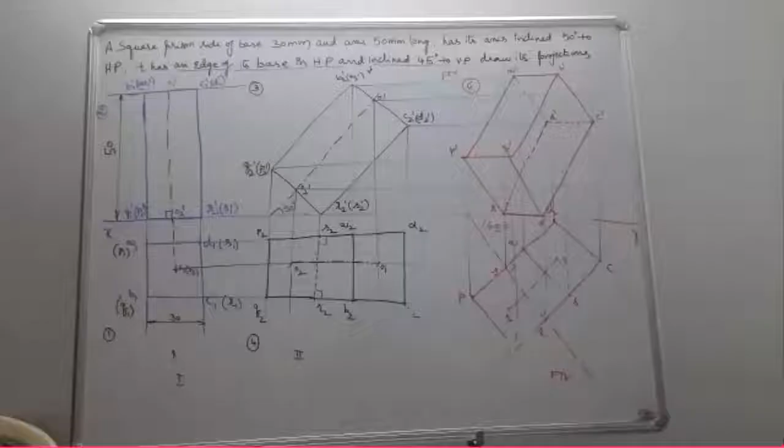Tausif? Sir? Tausif, respond. Are you there? Yes, sir. Tausif, your voice is not audible. Is the screen visible, Tausif? It is completely visible, sir. It is audible, sir. Sir, it is audible.

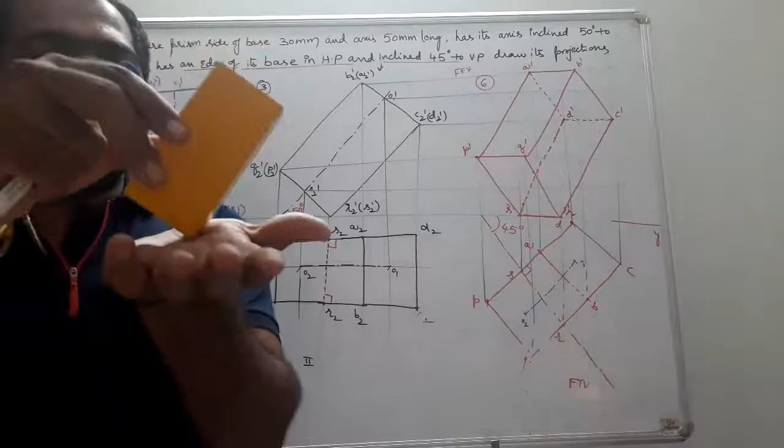Next, what is stage 2? Always consider the axis inclination such that one of the base edges is on HP like this. So this base edge is on HP. When you see the front, you see this point and this point is invisible. So that means R of S is going to be on HP, such that I reconstruct the figure in such a way that it is making 50 degrees to the HP. I reconstruct the figure such that R of S is on XY.

From here, draw the vertical projectors. From here, draw the horizontal projectors and mark the intersection points. So you will obtain your top view. Next, up to this 1, 2, 3, 4, we already did so many problems.

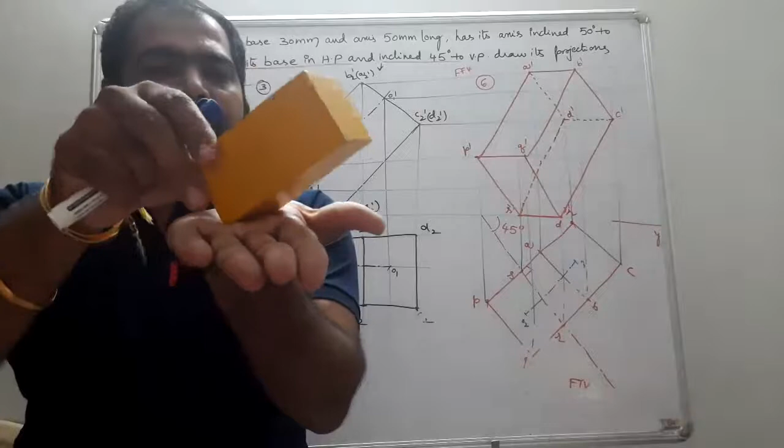Now, what was your stage 3? Solid resting on HP, axis is inclined such that one of the base edges is on HP, and the edge which is resting on HP is making an angle of 45 degrees to the VP. So that means in this position we can say it is inclined to both the reference planes. So when it is inclined at 45 degrees to the VP, I just draw a line of 45 degrees. The edge SR is to be on this 45 degrees line, and I reconstruct the figure.

Once I reconstruct the figure, draw the vertical projectors and the horizontal projectors and mark the intersection points. Join all the points and you will obtain the final front view. Okay, students.

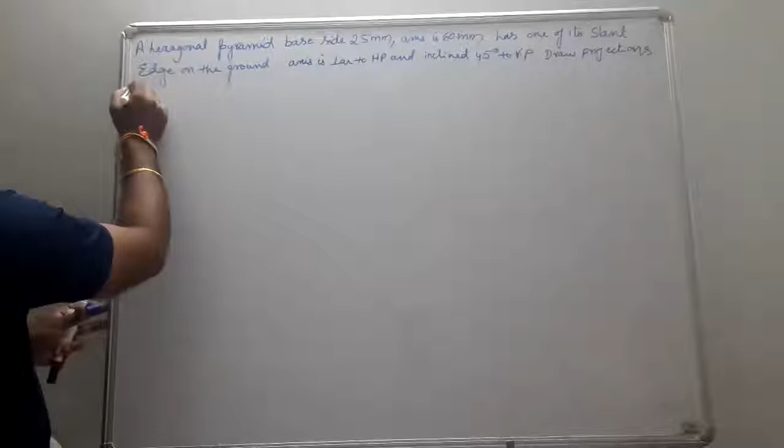a plane containing the edge and the axis is perpendicular to HP and inclined 45 degrees to VP. Draw the projections when the apex is nearer to VP.

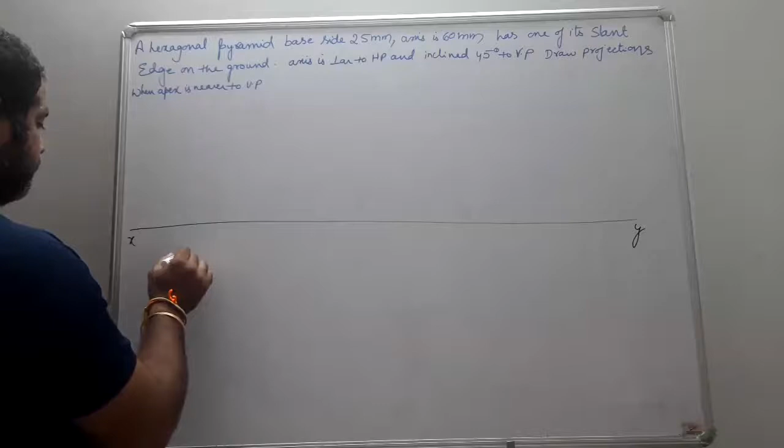So here it is a hexagonal pyramid. Now tell me which view gives the true shape. Axis is inclined to HP, so let us assume axis perpendicular to HP. Top view gives the true shape. You may get a doubt: why is your hexagon drawn in this manner? Why not like this?

Why not should it be like this, in simple position? So if it is going to be tilted, then what happens? This edge comes on the ground. That means a triangular face is going to be obtained. When you consider it as an edge resting problem like that, when you tilt it, this triangular face comes on the ground.

My requirement is that only the slant edge is on the ground. For that only, I construct it as a corner resting position. Why? Because corner to apex is going to be a slant edge. If I just tilt it, this slant edge comes on the ground. For that only, I consider it here. This is not considered. If we consider that the edge is on HP and the triangular face is obtained on HP, then you can consider this. But in the problem, he gives that the slant edge is on HP. It is on ground.

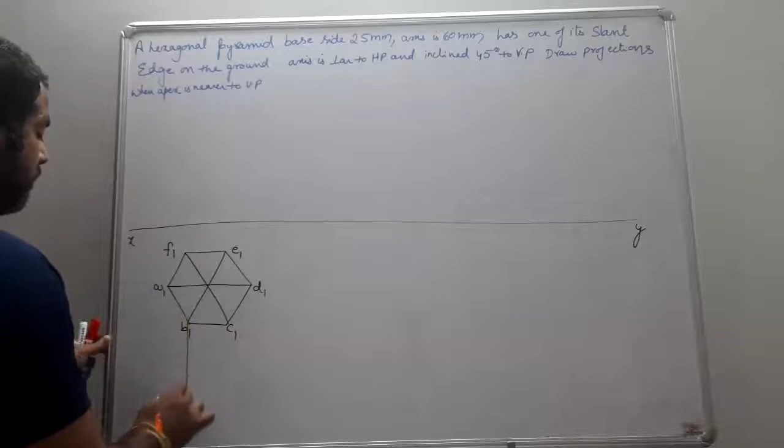Okay. So how many sets of points are you going to obtain? This was a pyramid, so you obtain only one set of points. When you see from the top, from the apex all the corners are joined. So mark the points A1, B1, C1, D1, E1 and F1. What was the side given? Base side is 25. This was step 1 and this was stage 1. So this becomes your O1 or O2. He also gives the height of the axis. What is the height of the axis? 60.

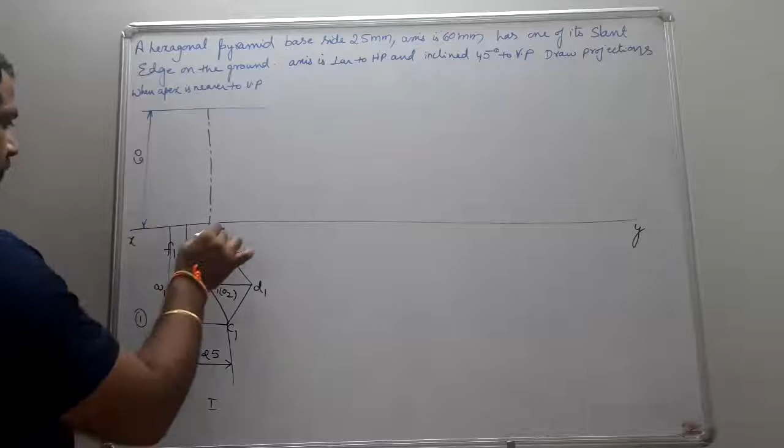Okay. And draw the projectors. When your base is resting on HP, the front view comes on XY. The base points all come on XY, so I project my projectors up to XY. Mark the invisible points in front view. If you see like this, A, B, C, D are visible, E, F are invisible. So this becomes A1 dash, this becomes B1 dash of F1 dash, this becomes C1 dash of E1 dash, and this becomes D1 dash. So this is your O1 dash and this is O2 dash.

Now join all; corners 1, 2, 3, 4 are visible, so the lines passing from here are going to be solid lines. So this was step 2. You see that when you join O with F and O with E, which are invisible points, those are drawn with dotted lines, but the dotted lines are hidden by the OC and OB solid lines. Always first preference is given to solid lines, second preference to dotted lines, and no preference is given to the axis. Next, what is stage 2?

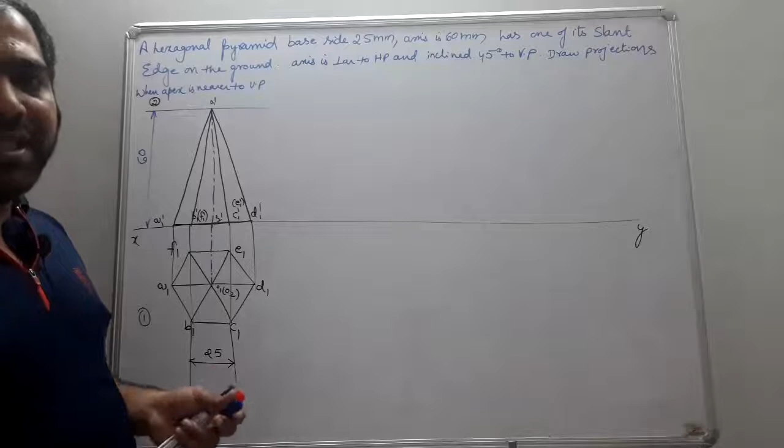In stage 2, the axis inclination is considered. Here the axis inclination is not given. What he gives is that one of the slant edges is on ground; that makes your axis inclined to HP. So I consider my slant edge OD on the ground. So simply, this becomes my O1 dash and this becomes my D2 dash. Let us consider it is stage 2. Let us consider ODA is a triangle.

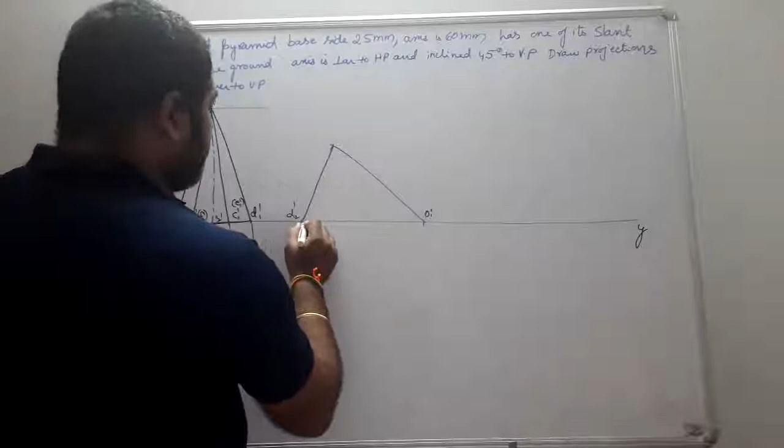I reconstruct the figure in such a way that ODA is going to be your triangle. So I know O and D. With OA as radius and O as center, draw; with DA as radius and D as center, draw; we obtain the point. Can't we get the remaining points? So this becomes your C2 dash of E2 dash, this becomes your axis, and this becomes B2 dash of F2 dash. This is O2 dash. This is step 3. This was stage 2.

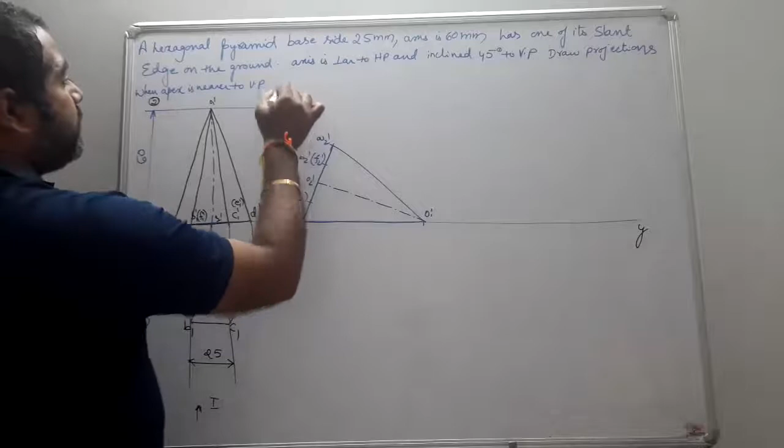Okay. Now join the edges. These are the slant edges. Now when you see from the top, you are going to see the bottom base completely visible. When you see from the top, this base is completely visible. Now draw the vertical projectors from here, and horizontals from here. And now mark the intersection points.

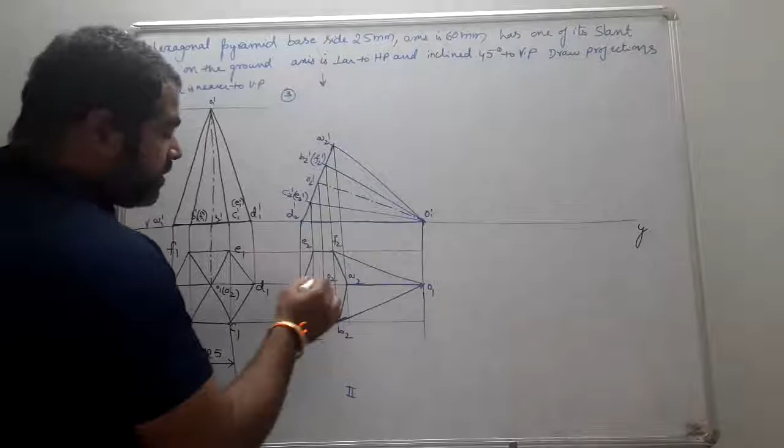Okay. Now if I am supposed to join D with O also, no problem. These two solid lines are going to coincide. Next, if I join E with O, EO is not going to be solid. Why? Because FA is a solid line. If I draw a solid line, solid lines are going to cross. So no two solid lines can cross.

So it should be dotted. Similarly, OC is also going to be a dotted line. Why? Because AB is already a solid line. If I draw the solid line, two solid lines cannot cross. So it should be dotted. Okay. So this becomes your step 4.

Next, what he gives, the axis is going to be inclined. It is to be reconstructed in such a way that the axis is inclined 45 degrees to the VP. So that means you can draw a line of 45 degrees, and you can reconstruct the figure in such a way that the axis is tilted so that the apex is nearer to VP.

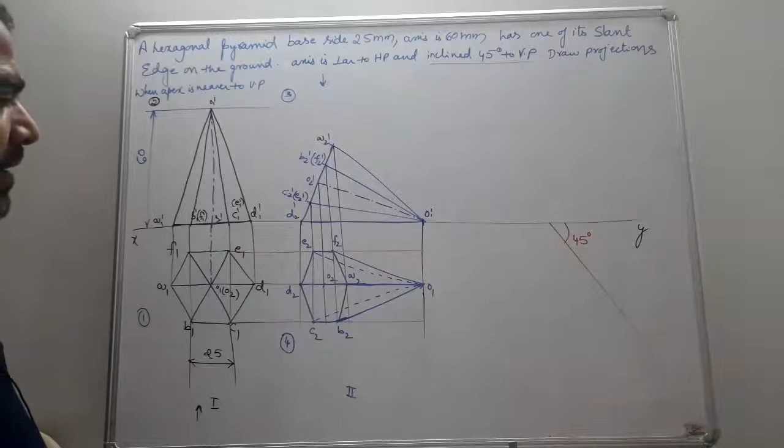So that means you can place your, this is some O, O1, and this is some O2. Once you know 2 points, can we get the remaining points? O2, here it is going to be A2, and here it is going to be D. So let us consider it is A and D without suffix. Now you will get your points as B, C, D, E.

You are going to obtain your reconstructed figure like this, and you are supposed to join, this becomes A, B, C, D, E, F. So after that you just join the points O, F, O, B. Okay, this becomes your 5th step, and this was stage 3. Why? Because your apex is nearer to VP, that means it should be nearer to XY. And from here, you are supposed to draw the vertical projectors.

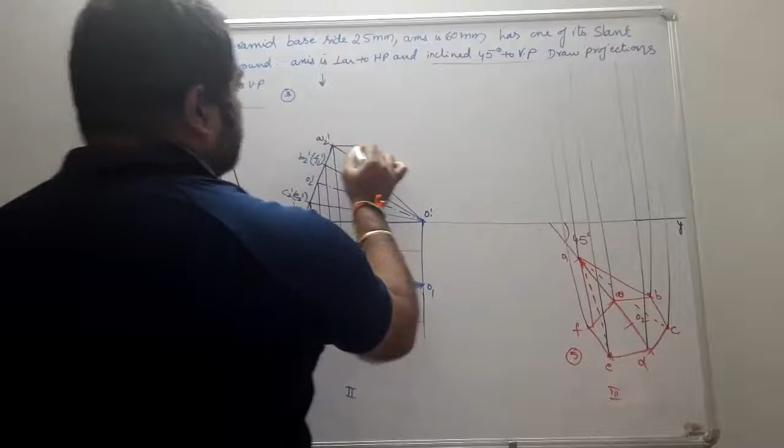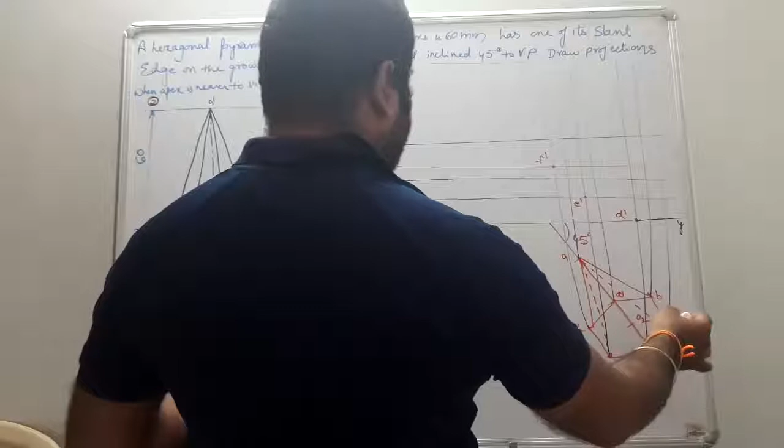And from here draw the horizontals. And now mark the intersection points. So here it is F and here it is F. You will get that F here. F dash. E dash. D dash. C dash. B dash. A dash. And here it is going to be your O dash.

Okay, so when you see from here, the bottom base is completely visible. That means when your solid is inclined with the apex nearer to VP like this, when you see from the front, the bottom base is completely visible. So I am supposed to join all the corners. Now the condition is join all the corners of the base to the apex.

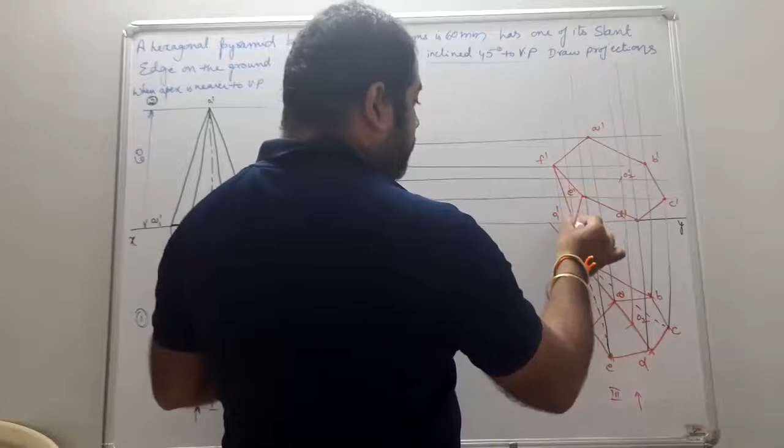So F with O, no problem. E with O, no problem. D with O also no problem. Now if I join A with O, solid lines cannot cross each other, so it becomes dotted. Similarly, B is also dotted and C is also dotted. Okay, so this becomes your step 6. Okay, students, is it clear?

Sixth step, which is very easy. Sixth step is what we did in the third and fourth. In the third step, you just draw the vertical projectors and horizontal projectors. The fifth is already obtained. From fifth, I draw the vertical projectors, and from three, draw the horizontal projectors. Now mark the intersection points. After marking intersection points, how can we join this? This was your final front view. This was your final top view.

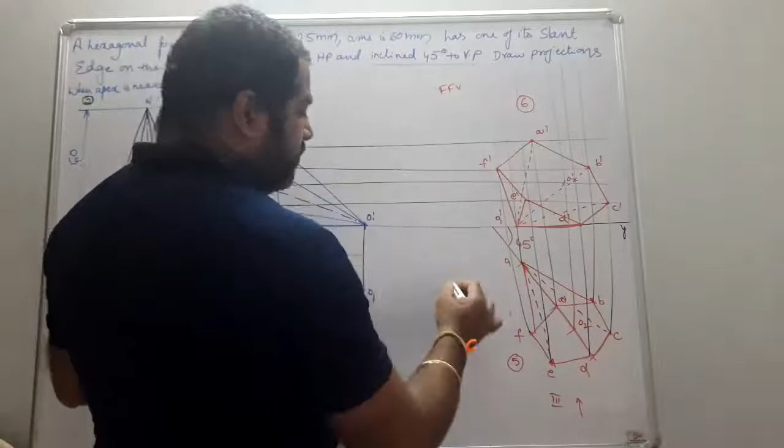So always see how you are supposed to see the front. If you see in this manner, that becomes your front view. When the axis is making 45 degrees to VP, it should be like this or like this. But the condition given is apex is nearer to VP, that means in this manner. If your solid is in this manner, when you see from the front, the base is completely visible. So I join all this base with solid lines. Why? Because it is completely visible.

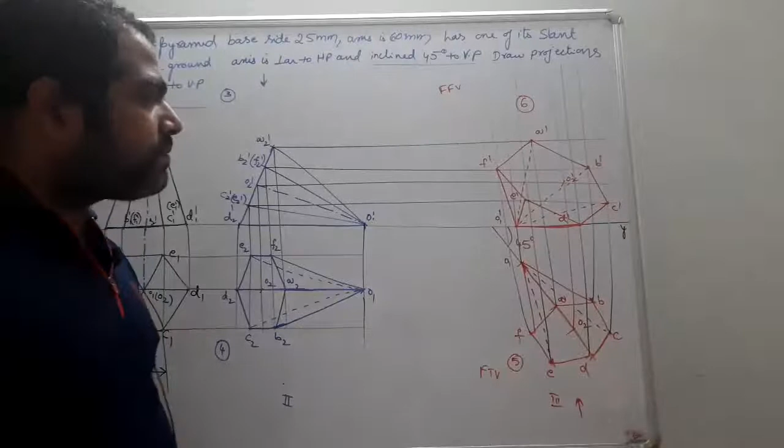Now, here it is my O dash. Once I obtain all the corners of the base, I am supposed to join all the corners to the apex. Now I take my principle, no two solid lines can cross each other. So I joined F with O. I didn't get any problem. Straight line, solid line. E with O, no problem.

D with O, no problem. Now, if I join A with O as a solid line, here FE is a solid line, it can bisect. No, it should not be done. Why? Because no two solid lines can cross. So then I just change it to a dotted line.

Similarly, B with O is to be joined. If I draw the solid line, these two are also going to get crossed, so I didn't do that. So again, B with O is also a dotted line. Similarly, C with O, it is also a dotted line. Why? Because ED is going to be the solid line.

Okay, now O2 dash and O dash is going to be your axis. Okay students, is it clear now?

So we can do this problem in the auxiliary method also. Shall we do that? Let us see. So axis inclined to 45 degrees means simply what should I do? I just extend my axis.

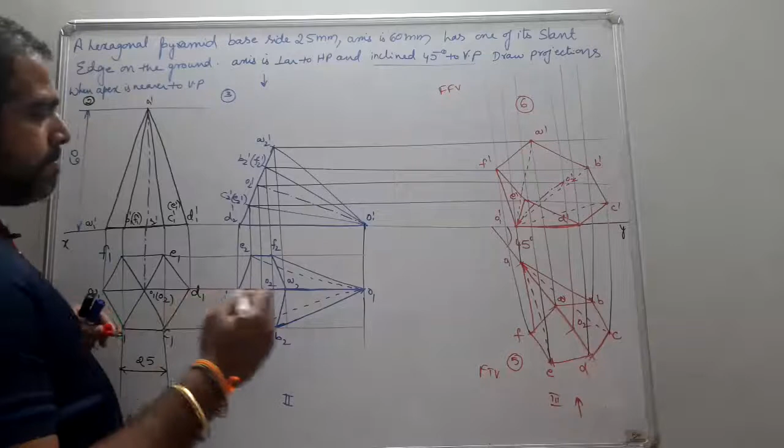I just remove the problem here. So the problem you just noted down already. I just remove the problem for my construction of the auxiliary method. You just see how can we do it in the auxiliary method also.

Simply, so this was your final painting. This was the final copy, that's okay.

Now, auxiliary method means how many steps are you going to obtain? 5 steps. What are they? 4 and 5 are my final steps. In the auxiliary method, the 4th and 5th are the final steps, right?

So now already I've got my final top view in the auxiliary method.

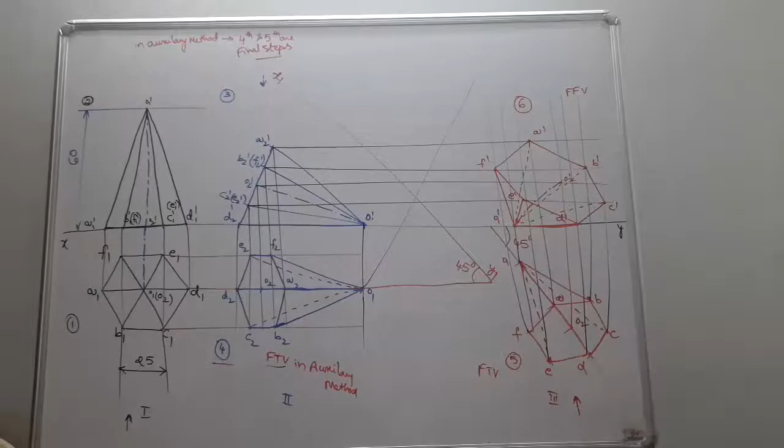Let us see, from here I just draw the perpendicular from F. Wait a second, until now I just take a pic. Okay, I just draw the perpendicular for here and from here, from here. So from all the points, I draw the perpendicular projectors for the new reference line X1 Y1.

Okay, and I place the... what am I supposed to place? My front view to be obtained. How can we obtain my front view?

From the new reference line X1 Y1, take the previous front view. Previous front view is the third step. So take the distances of all the points from the old reference line and put it from the new reference line. Okay, let us see this.

Let us see, first of all, this D point is going to be on D2 dash. In the third step, this was the front view. So the fifth step is going to become my final front view. What is our reference? This front view is our previous front view, meaning this is our reference.

Take your D2 dash point, which is on XY. Now let us take the D projector. So D point is also on the new reference line X1, Y1.

Now let us see C point. C point is going to be some distance from here to here. This distance is taken as radius. And now take the C projector and mark the point, this becomes your C dash.

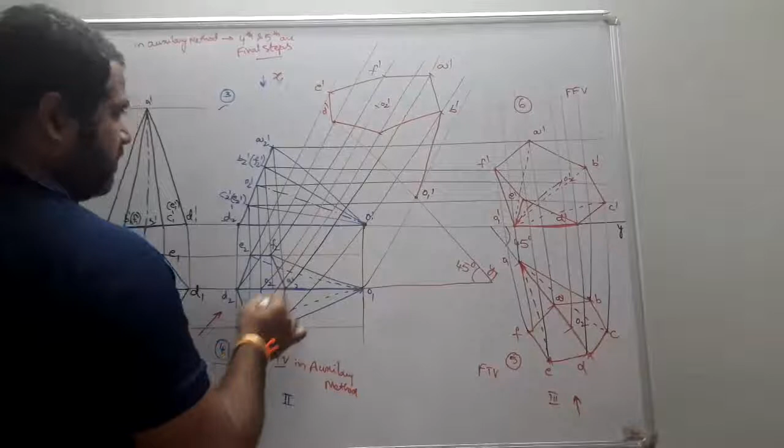excuse me, B dash with O dash. Next, if I join, this becomes your C dash. C dash with O dash. D dash with O dash. And if I join E dash with O dash as a solid line - this was solid line, this was solid line, so this becomes dotted line. Similarly, E. So this becomes my fifth step.

This becomes my final front view, and this becomes my final top view in the auxiliary method. This is the change of position method, CPM - change of position method. And this is the auxiliary method. Students, is it clear? So in this auxiliary method, the fourth and fifth steps are going to be my final steps.

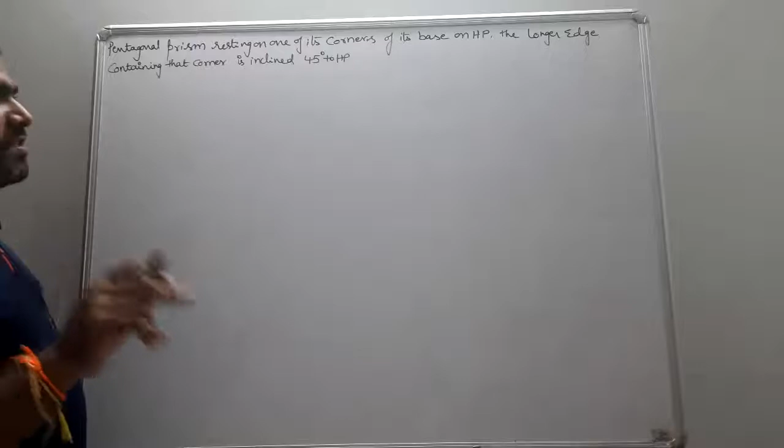Next, write another problem. A pentagonal prism is resting on one of the corners of its base on HP. The longer edge containing that corner is inclined at 45 degrees to HP. Axis of prism makes an angle of 30 degrees to the VP. Draw the projections of the solid.

Draw the projections of solid - that was the first bit. Also draw projection of solid when the plan of the axis is inclined 30 degrees to XY. Base side is 30 mm and height of the solid is 70 mm. Very important problem.

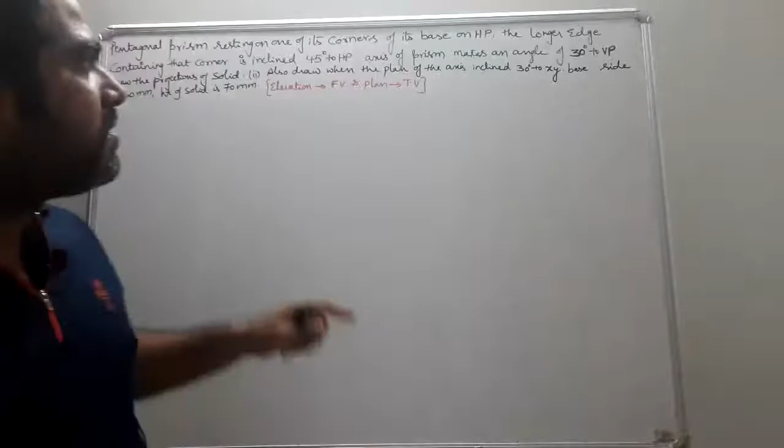Don't get confused. So when the plan of the axis is inclined 30 degrees to XY, in this problem you are going to obtain 8 steps. Why? Because this problem is going to be a diagonal problem. We are supposed to find the apparent angle beta, and also construct directly 30 degrees to VP. We find the apparent angle and reconstruct the figure on the apparent angle - that is the consideration in this problem.

Why do we need to find the apparent angle, sir? How do we know to find the apparent angle? Whenever it's a corner resting problem, as we already discussed in projection of planes and simple position of solids - whenever your corner resting problem involves seeing a diameter or diagonal, then you have to find the apparent angle. Here you see it's resting on one of its corners. When you see this corner resting problem, it means you have to find the apparent angle.

So this means also when the plan of the axis is inclined - without finding the apparent angle, you can construct it, that is also the second step. So for this problem, you are going to obtain 8 steps in change of position. Now let us see how we can do this problem.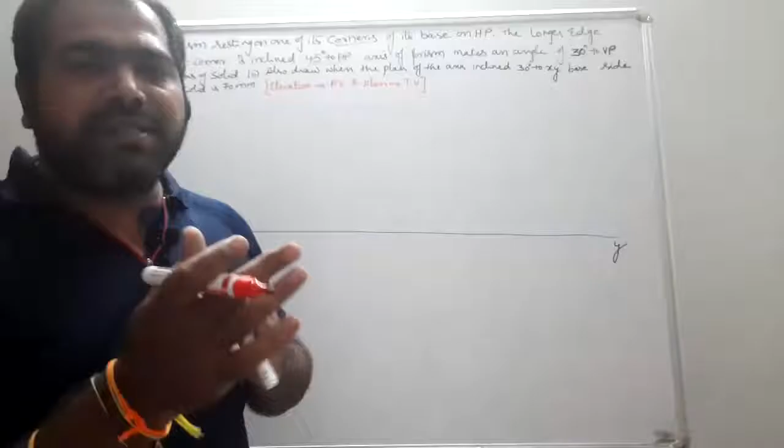First of all, axis inclination is given. Let's see if the problem tries to confuse you. First inclination is based on HP - longer edge containing the corner is inclined 45 degrees... wait, to HP. So whenever you simply see this, don't place your axis perpendicular to VP - that would be completely wrong. What he gives is the longer edge containing that corner is making the inclination.

That means if it's a pentagonal prism resting with one of its corners - let's see which corner it is resting on, and the longer edge containing that corner is inclined. So this means like this. Next, axis of the prism is inclined 30 degrees to VP. So this was the first consideration we had to make - we always had to consider the edge containing that corner is inclined.

Yes. So just confused? Let us see. First of all, the longer edge containing that corner is inclined. How many degrees? It is 45 degrees to HP. Yeah, all of you just see this. So it is very easy to understand. Just confused? Let us see.

If the solid is resting on one of its corners, and if it is tilted, meaning this longer edge is making an inclination, then we can say this total solid is going to get inclined. Whenever the total solid is inclined, the axis also gets inclined. Okay, so first we can directly consider the axis perpendicular to HP. Don't go for the axis of the prism making an angle of 30 degrees to VP directly.

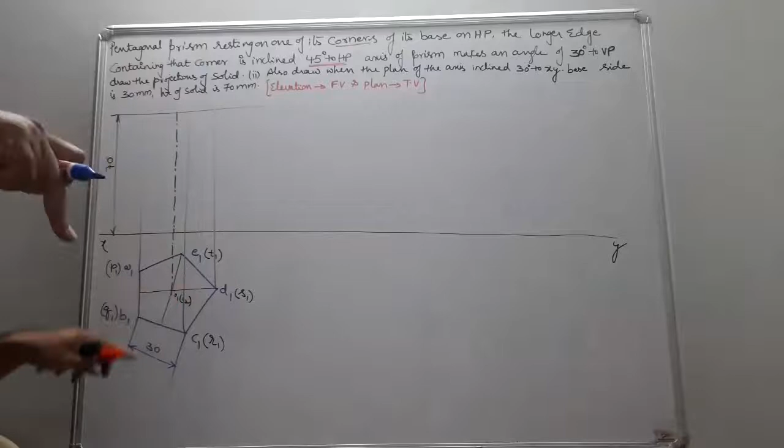Okay, now mark the points. What are the top base points? Which are visible points? From the top, A, B, C are visible. So while coming from the front, A, B, C, D come on the top. So this becomes B1 dash of A1 dash. Simply, if you see the top, this was step 1, stage 1. A, B, C, D, E appear on the top base. So while you see from the front, B, C, D are visible. So this becomes C1 dash of E1 dash, and this becomes D1 dash. Okay.

Okay. So these three corners are visible. The lines passing through the visible corners are going to be solid lines. Okay. So this becomes O1 dash. This becomes O2. This becomes your step 2. Okay. What was our stage 2? That is step 2. The longer edge containing that corner is inclined 45 degrees to HP.

So the HP inclination comes above XY. The longer edge containing that corner is DS. So that is going to make an angle of 45 degrees. That means this edge is making 45 degrees. So draw a line at 45 degrees.

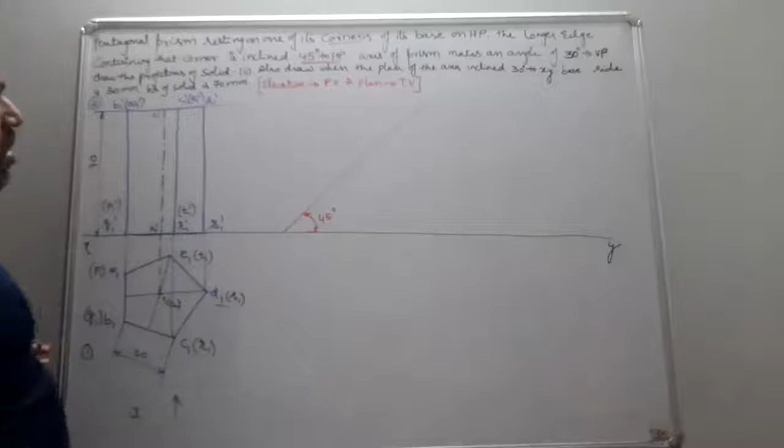Let us place the bottom points also. So this becomes Q1 dash of P1 dash. This becomes R1 dash of T1 dash. This becomes S1 dash. Now S dash D dash is on the line. This becomes S2 dash. This becomes D2 dash.

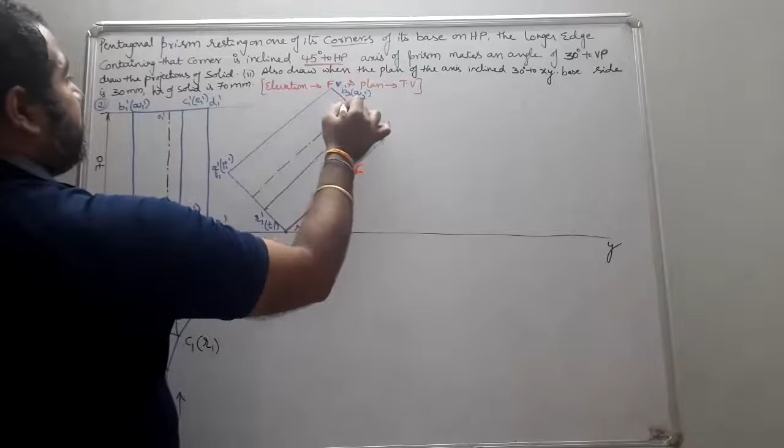Okay. So this becomes your Q1 dash of P1 dash. Here it is R1 dash of T1 dash, and here it is your axis. Okay. So these points become B2 dash of A2 dash, this is O1 dash, C2 dash of E2 dash. Okay. Now this becomes your third step.

So when you see from this view, this base is completely visible. Now let us see what is going to happen. So draw the vertical projectors from here, horizontals from here, from all the intersection points. So this becomes your, let's take this as P2. Okay, so this is P2.

P2, Q2, R2, S2, T2. Similarly, it is A2, B2, C2, D2, E2. So when you are supposed to see from the top, this top base is completely visible. So I just join all the points with the solid lines.

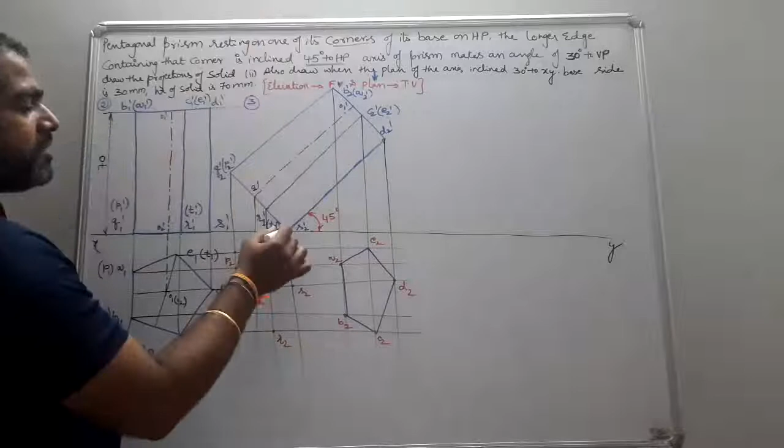Okay, and from here, the farthest point is going to be S2. From here, farthest point is S2. I just go for the principle: lines which are passing from the farthest point are going to be the dotted lines. So here S is going to be the farthest. So I just consider the lines which are passing from S are going to be dotted. So remaining I just go for the solid.

Okay, now I'm supposed to join all the consecutive points, that is AP, BQ, CR, DS, ET. All are going to be just joined. Now let us see P with E. Is there any problem? I just go for the solid line. There was no problem. P with A, let us go for it. I just go for the solid line. There was also no problem. Why? Because solid line and dotted line can cross.

Now again I go for Q with B. No problem. Why? Because solid and dotted line can cross. Now again go for R with C. No problem. Now if I am supposed to join S, S is going to be the farthest point. Lines passing from S are going to be dotted. And solid and dotted can cross each other. So this becomes your O2. This becomes your O1. So the axis line is to be represented up to here, because here also the axis exists, but it is covered by the dotted line. Okay, so this becomes your fourth step, and this is stage 2.

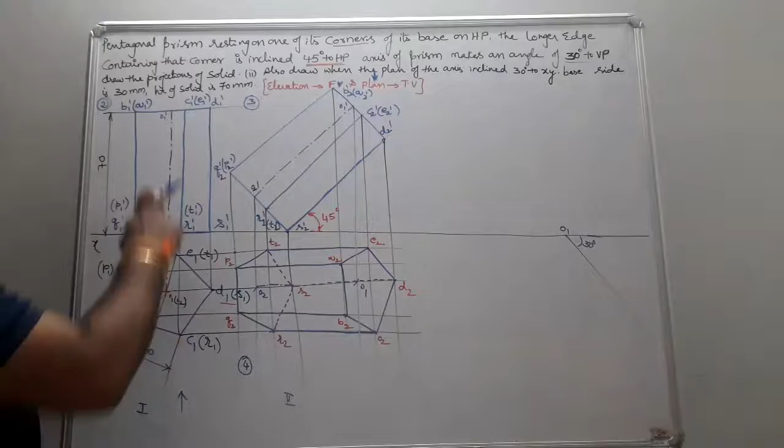So first of all, draw for the given inclination 30 degrees to VP. I just draw a line of 30 degrees. I just mark my point at some O1. Now I just take O1 O2, the initial height of the solid, as radius. O1 O2 is the height of the solid. Okay, and I draw an arc on this 30 degrees. This becomes your O2, and draw a line passing through O2. That becomes the locus of O2 now.

Now take the reduced axis length, which is obtained in the fourth step. That is, the height of the solid is going to be reduced. Why? Because when your axis is inclined, in one view you are going to obtain reduced length. So let us take this axis height, that is O1 O2 in the fourth step. Again with O1 as center, draw an arc here, and the angle you obtain with the horizontal is beta. Okay, students. Now we just obtained your beta.

Now construct the figure in such a way that it is on beta. Okay. So that was one thing. And another one is directly when the plan of the axis is given. Plan of the axis is given means the top view of the axis is inclined, so directly the top view is going to be inclined. That means directly on the 30 degrees line you just reconstruct the figure. Directly on 30 degrees.

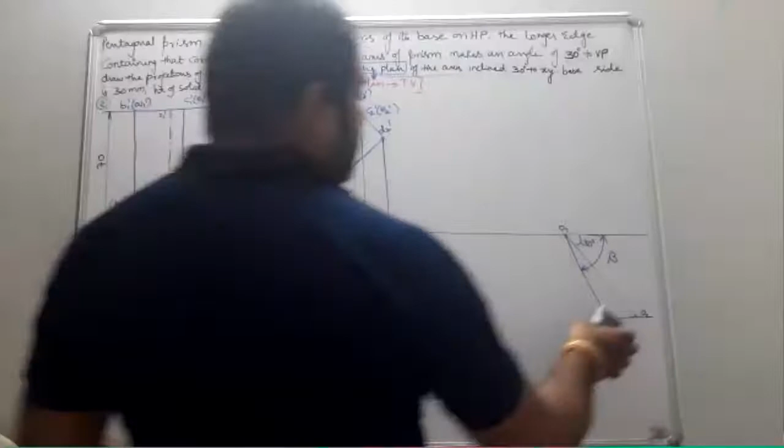So let us see. First of all, all of you just note how you can obtain your beta. Then you just measure it and place it separately. Once you know your value of beta, you just draw a line of beta and you can reconstruct it. Now first of all, I just take a line of beta. Draw a line of beta. The procedure is the same. Either you find the apparent angle beta and reconstruct the figure on beta, or in the second case, without finding beta, draw a line of 30 degrees and reconstruct the figure.

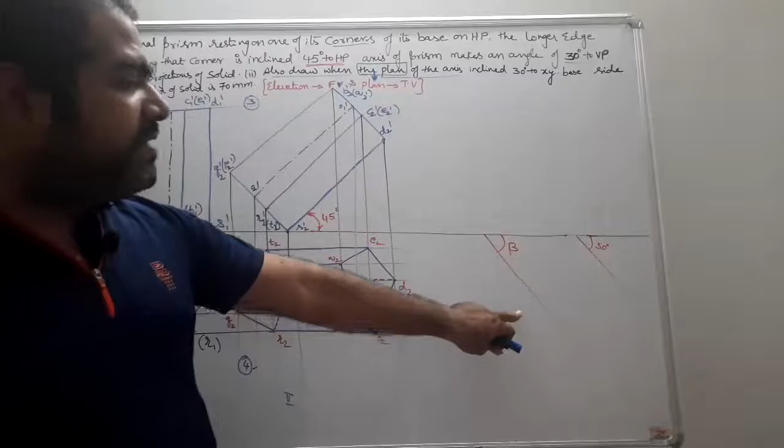This was the first bit. That means the corner that is resting means directly we find beta and we reconstruct the figure on beta. The second bit is when the plan is given, so directly you just go for 30 degrees without finding beta. Okay.

Now let us see what we should do. I just draw a line of beta. I am supposed to reconstruct the figure in such a way that either you reconstruct in this manner or in this manner. That's your choice. First of all, I just place this as O2 and this as O1. Okay. So all these points are going to be obtained. This was D and this was S. Okay.

Now mark the points. So once we have your 4 points, can we get the remaining points for this pentagon and this pentagon? Let us consider this top pentagon. So D.

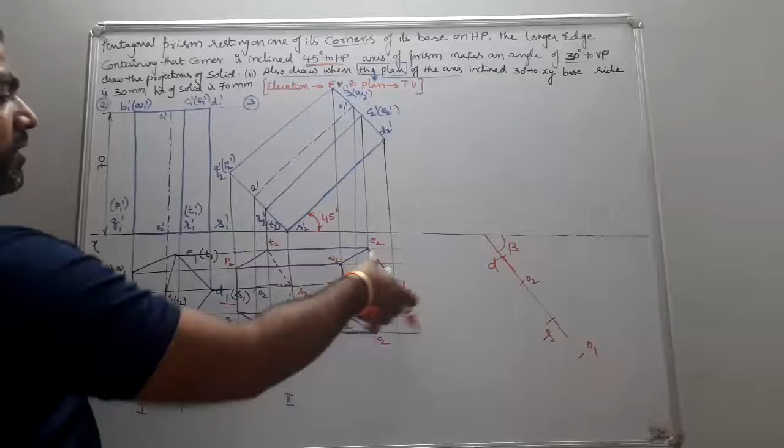Students, is it visible? So I just lost my power, lost the power in my home. So it was a cloudy environment here. The sunlight is very poor. I'm just trying out. Wait a second. I just turned on the generator. Wait a second. Wait a while. Yeah, it's okay now. Okay now? Okay, right?

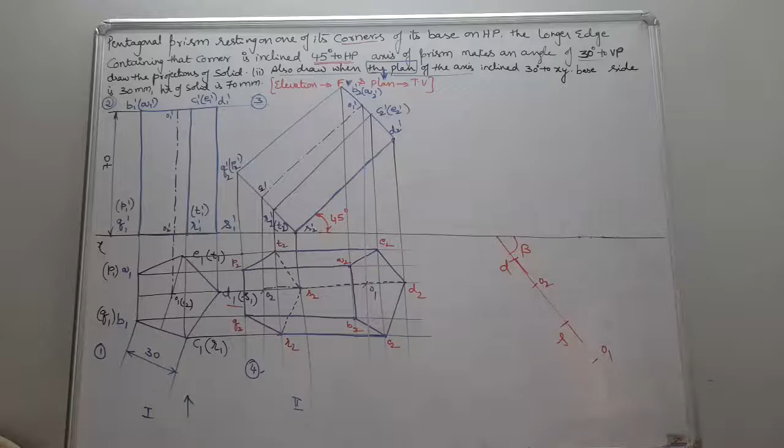Rajan, Marchu. Okay, it was clear now? Okay, we just proceed.

Fourth figure on this step. That is nothing but your change of position. The position is going to be changed to beta. So beta is nothing but your axis is going to be making inclination to axis of the prism. That means axis making 30 degrees, such that I place O1, O2 on this. Okay, so this is going to be your axis line. Not a straight line, it is an axis line. Okay, now mark the remaining points.

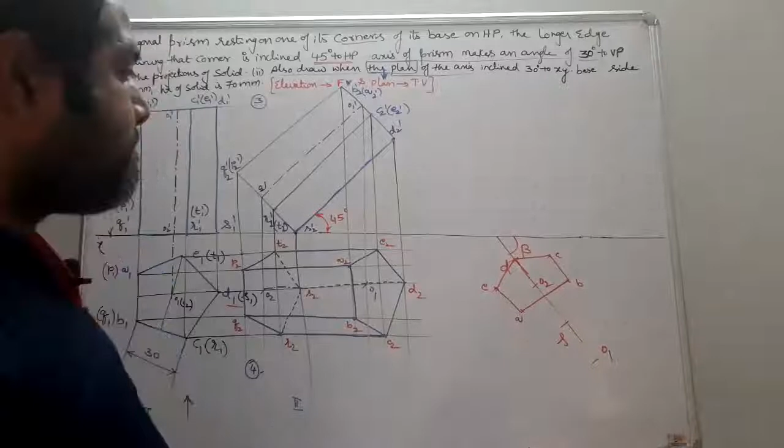All of you just do it. Line of beta. Okay, and I just place my O1, O2. This was B. A, B, C, D. Okay, similarly, I obtain this is my S,

P, Q, R. Okay, and I'm supposed to join ST, AP, BT, PQ. Okay,

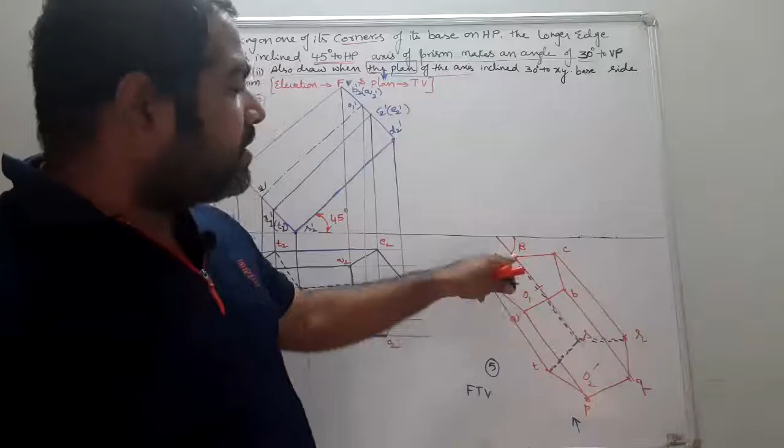don't get confused. The lines which are passing from S are going to be dotted. So this becomes your fifth step. Okay, so this becomes your final top view. Now, when you see from this front view, this base is completely visible, right? When it is inclined like this, this base is completely visible, this is invisible. The farthest point is taken, so the lines which are passing from D are going to be dotted.

Now let us draw the vertical projectors from here. Similarly, draw the vertical projectors from all the corners and draw the horizontals from the previous front view. Okay.

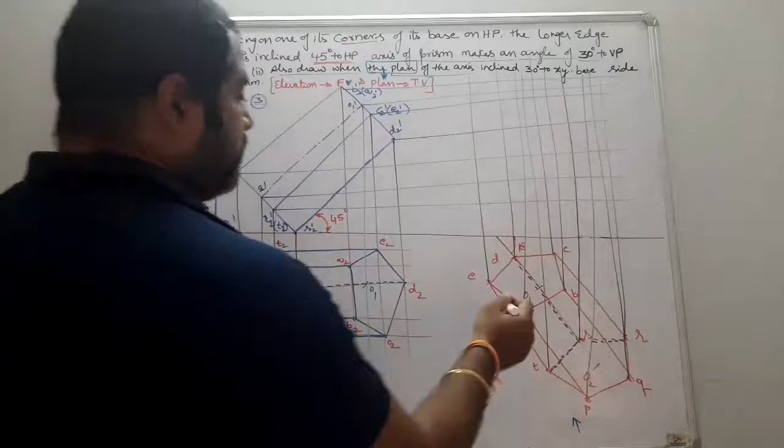Now mark the intersection points. Let us go for ABCD first here. ABCD, mark the intersection points. This was A dash, B dash, C dash, D dash, E dash. Similarly, place the bottom points.

So here it is T, QP. Let us take QP, and these are PQ. This becomes P dash, Q dash. Next, R dash, T dash. This becomes S dash. Okay. Now, when you see from here, this base is completely visible. So this is joined with the solid line.

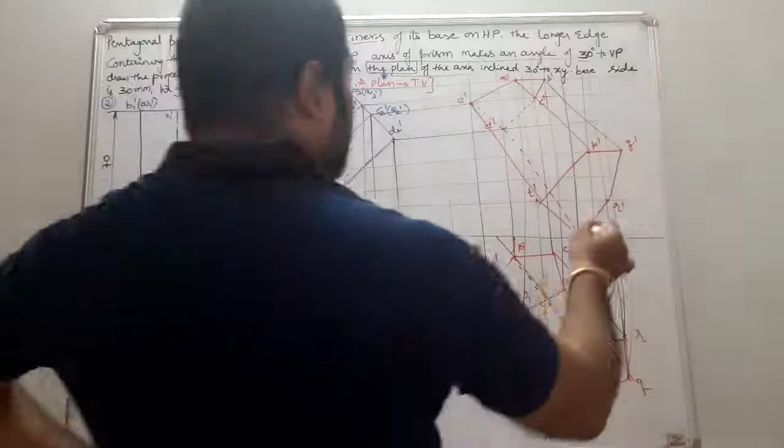So like this, you will obtain a pentagon like this. I made a mistake somewhere, so my shape is awkward. In your original construction, the top view is obtained clearly, but in the front view I made some mistake. I think I misplaced the points. Okay, so this becomes your final front view. You just understand the concept, right? That's okay.

So you will obtain your axis somewhere here. O1 dash, O2 dash. That becomes your axis. Students, is it clear? The procedure is the same, but I made some mistake in construction or placing points. So the shape just got changed. But the procedure is like this. Okay, is it clear? Students, is it clear?

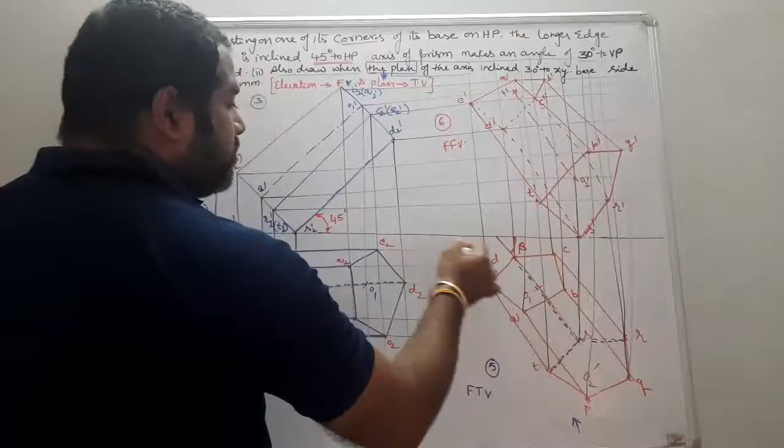So next, another method: you just do the same procedure I constructed here for beta. You just do the same procedure, taking an angle of 30 degrees, and directly do the procedure. So this becomes your 7th and here you will get 8th. Okay. So this was our first step only. That was in the problem, that is 5 and 6.

This was stage 3 generally. So stage 4 is this, that is nothing but 7 and 8. 7 and 8 are going to be obtained by taking an angle of 30 degrees; directly reconstruct the obtained top view on this 30 degrees. Okay.

Okay, students, understand what the 30 degrees line is? In the second point, he just gives the plan of the axis. That means the top view is making an angle of 30 degrees to XY. So obtain the top view. That is, step 4 is directly reconstructed on the 30 degrees. Okay, students, is it clear?

Shall we move to the next problem? Shall I erase this? Can I erase this column? Okay, take another 2 minutes, no problem. Just take 2 minutes. Make it fast.

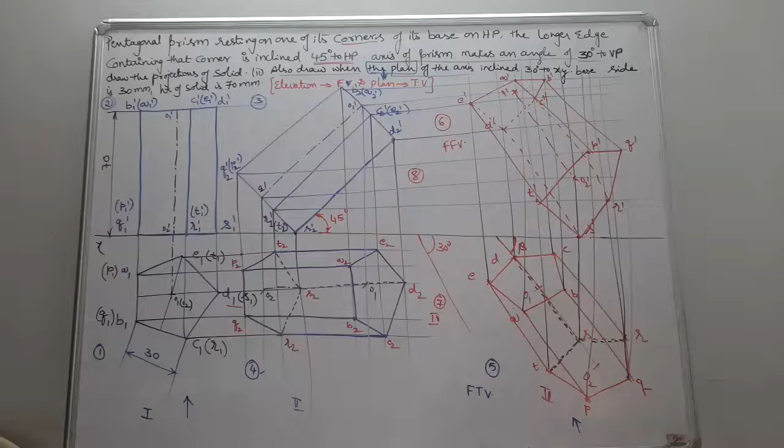13.18, 13.19. You just have to see the problems. Problem numbers 13.18, 13.19, 13.20. All of you just mark these. Problem numbers 13.18, 13.19, 13.20, 13.21, 13.22, 13.23, 13.25, and 13.31. Those problems you have to look over. Okay.

Now can I erase this? Can I erase this problem? So somebody had put their thumbs down. So they say this problem is a solved example in the textbook, that is 13.19. You just go through 13.19 or 13.21. You just go through the textbook, solved example. NDB textbook 13.21 or something.

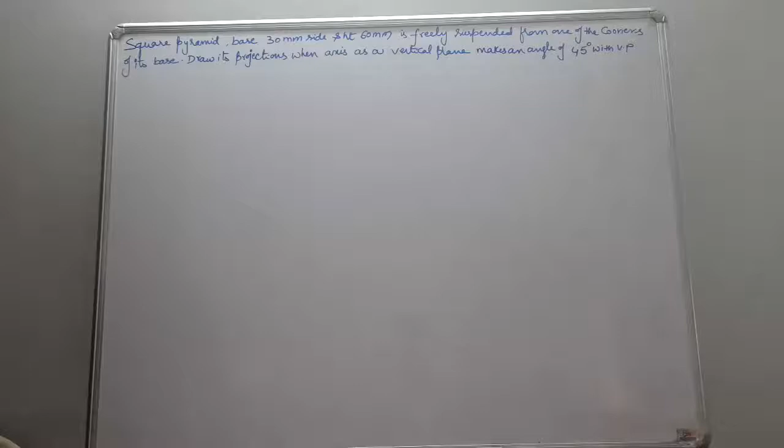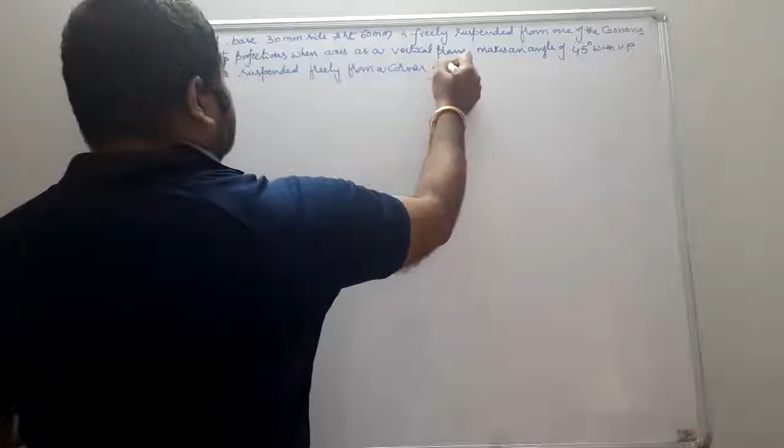Okay. Now he just gives a very important point to solve this. When a pyramid is suspended freely from a corner of its base, the imaginary line joining that corner

with the center of gravity of the pyramid will be vertical. This was the point to remember to do the problem. All of you just read the problem carefully.

A square pyramid, base 30 mm side and height 60 mm, is freely suspended from one of the corners of its base. Draw its projections when the axis has a vertical plane that makes an angle of 45 degrees with the VP. So first of all, we have to consider the square pyramid. Let us consider the square pyramid.

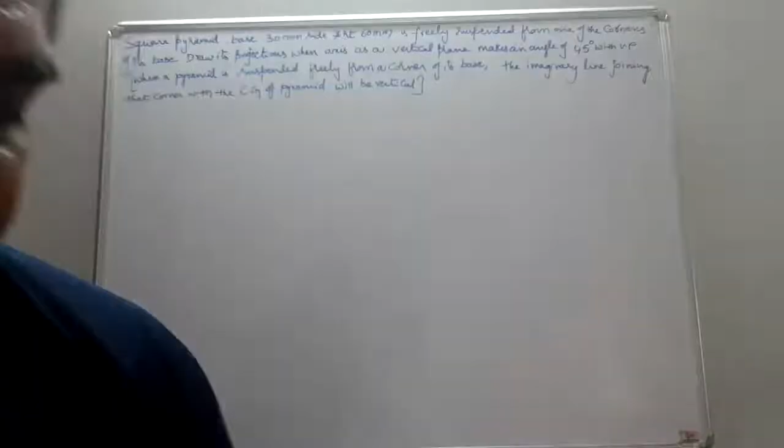So our first step is to draw the true shape and size. For the top view, we use the true shape and size. So this is A1, B1, C1, D1. The given side is 30. This is a pyramid, so all the corners are joined to the apex from the top. This becomes O1 of O2. From here, I draw my axis. The height of the axis is given as 60.

Okay. A pyramid has only one bottom base. When it is resting on HP, the front view comes on XY. So draw the projectors up to XY. If it is a prism, one base comes at the height of the axis and one base comes on XY. Here it is a pyramid, so it comes on XY. The front view comes on.

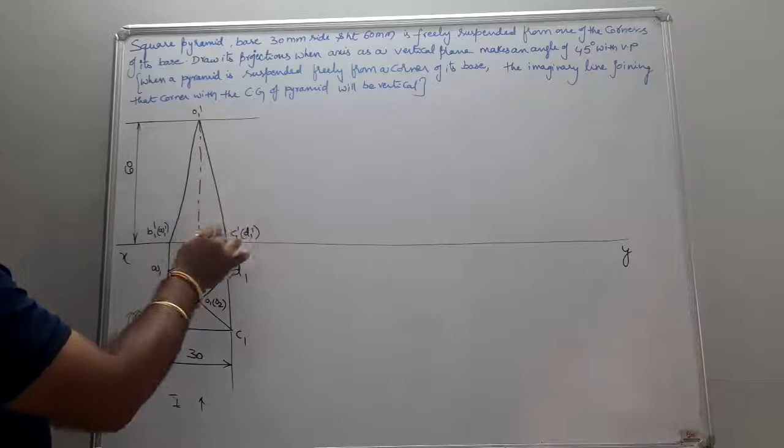So let us see what the points are. This was step 1, stage 1. Tell me what the visible points from the front are. B and C are visible, so this becomes B1 dash of A1 dash. Similarly, this becomes C1 dash of D1 dash. This is O1 dash. This is O2 dash. Okay. Here you obtain your stage 1, and this is your step 2.

Next, did he give the axis inclination? No. He just says it is freely suspended from one of the corners. So whenever it is freely suspended from one of the corners, the imaginary line joining the corner with the center of gravity of the pyramid will be vertical. Let us consider the center of gravity of the pyramid at h by 4 height. That is somewhere here. This is g. Okay. Now I consider the corner is going to be

Students, we made a mistake. Can anyone tell me what the mistake is? Students, I made a mistake. Can anyone tell me? I made a blunder in the simple position. What is it? Anyone? Inverted. Next.

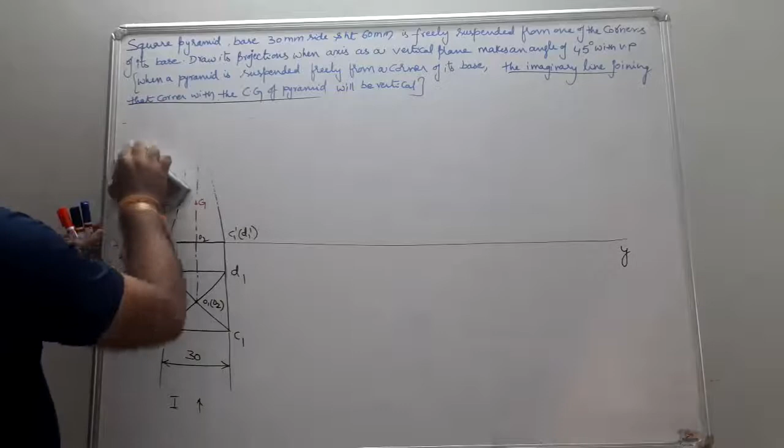Actually, you have to write the given data, and then you come to know whether it is edge resting or corner resting. Based on that, you go for it. I didn't write the given data, and I blindly went for a square pyramid as if it were edge resting. If you do it like this, you will get 0. So you have to concentrate on the given data also. This was a blunder which I made. Take it as a warning and don't do this.

Okay, so don't confuse. It is a square pyramid, but I am not supposed to go directly for the square pyramid. Why? Because it is suspended freely from one of the corners. So it is a corner resting problem. XY. For a corner resting problem, it is equally inclined at an angle of 45 degrees, so it should look like a rhombus.

So given axis is going to be 60. Okay, so this was step 1, stage 1, and when you are going to see from the front, you can notice given this height is given as 30.

From here draw the vertical projectors from here to here. So when you are supposed to see from here, A, B, C corners are visible, and the lines which are visible corners, if you just go for drawing, this is nothing but your O1 dash. So lines where corners are going to be visible means the lines which are passing from apex are also going to be visible. So this becomes your A1 dash. This becomes B1 dash or D1 dash. This becomes C1 dash.

So this is the solid line, this is the solid line, and here it also solid line. Why? Because this B corner is visible, apex to B is going to be solid, but D is invisible, so it comes at the same point. So here it is also dotted line, but it's hidden by the solid line, and axis is least preference, but axis exists. So for that I mention it is O1 dash and O2 dash. Axis also gets hidden by this solid visible outline. So this becomes my step 2.

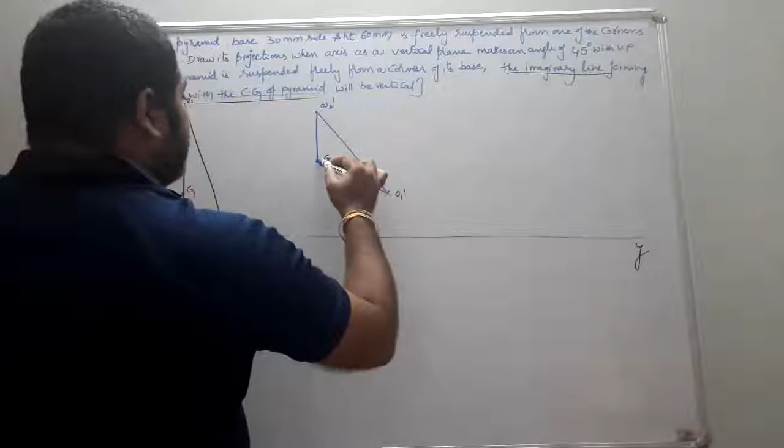And I know that G, B are going to lie on the same line. Now you see, O, G, B lie on the same straight line. So I extend OG to some extent and I take GB dash as radius, draw an arc.

So this becomes B2 dash or D2 dash. Now I know that if I know my B dash, A dash and B dash can join. I join A dash with B dash. And you can see that A dash, B dash, C dash lie on the straight line.

So I extend my A dash, B dash to some extent, and I take A dash, C dash as radius, A dash as center, try to obtain my C2 dash. Once I obtain my C2 dash, now I join C dash with O dash, C dash with O dash. And I know that these two are going to be perpendicular, and this was going to be perpendicular.

Students, is it clear? Is it clear how to reconstruct the figure such a way that A to G is going to be vertical? Can I explain once again?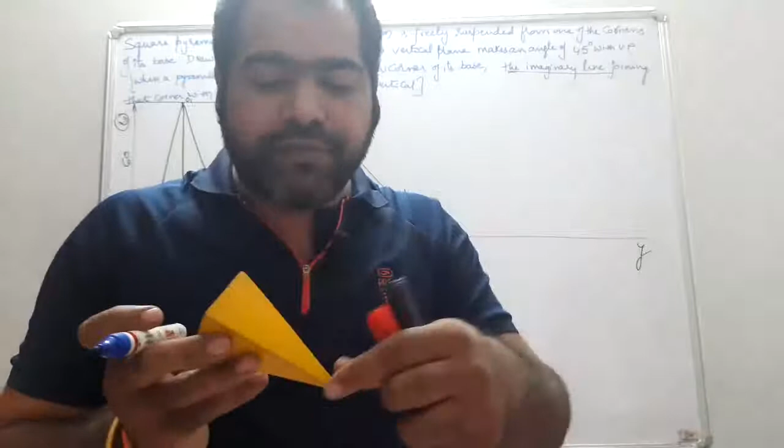Okay, one more point: if my solid is making an inclination like this, when I see from the top, I just see the base points and 1, 2, 3 corners, and the slant edges passing from the apex to these 3 corners are noted. But the bottom slant edges, seen from the top, are not seen. So let us see - that bottom point is going to be, let us say, A, D, C, and it is going to be your B.

So furtherly, when you are going to be seen in this manner, okay, like this. Why? Because when you are going to be seeing from this top, when you are supposed to be seeing from this top, you are going to see the 1, 2, 3 corners, and these are slant edges, and the base is completely visible, and this solid edge is not going to be seen from C. Okay, for that only I just construct here.

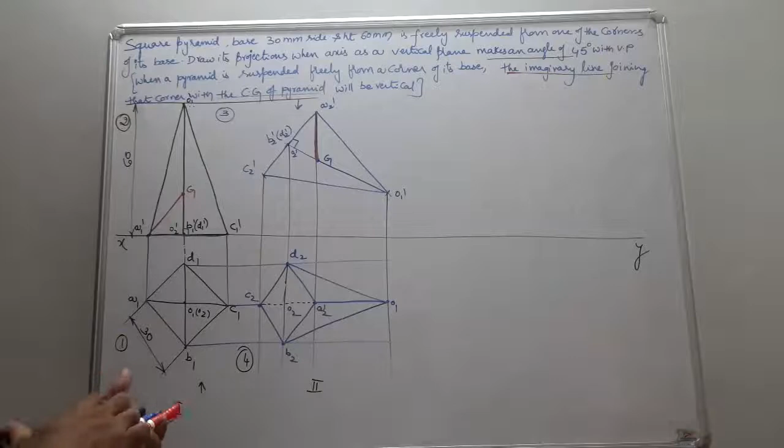So do it at an angle of 45 degrees with VP such that the apex is nearer to VP. So you can reconstruct the figure in this manner, or in this manner, or you can tilt it like this. Okay, now I just do the procedure for apex nearer to VP. This was simple, I just go for it.

Draw a line at 45 degrees with VP, such that the axis is going to be on this 45 degrees. This becomes your O1 and this becomes your O2. And the same points you are going to obtain. This is C and this is A. And you see that D, O, B lie on the same line which is perpendicular to here.

So if I draw the perpendicular from here, I just obtain my points. So this becomes your A, B, C, D.

Okay, so this becomes my fifth step, and this is stage 3. This is my final top view.

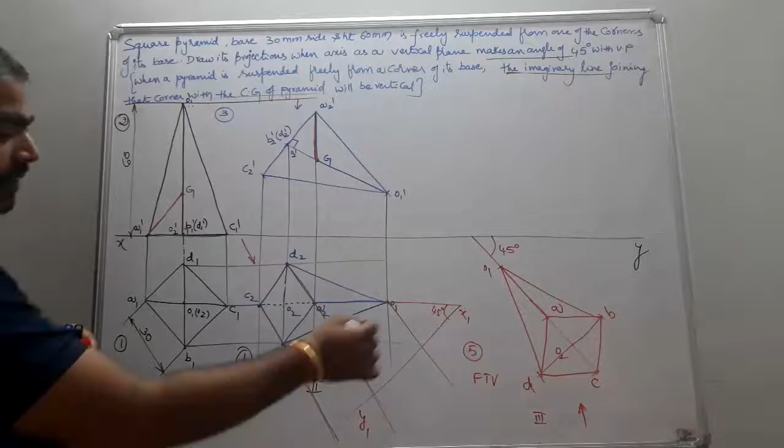And here, if it is going to be the pattern, if it is X1 Y1, your observer is going to be perpendicular to the new reference line X1 Y1. That means if it is your reference line X1 Y1, the observer is perpendicular to this, and he is going to be seeing in this manner. Similarly, if it is in the change of position method, the observer is also going to be here, which is perpendicular to XY. Now let us draw the vertical projectors from here.

Okay, and draw the horizontals from the previous front view. And now mark the intersection points.

So if you consider an auxiliary, then this becomes your final top view. Here you will obtain the final front view in the auxiliary method. So this becomes fourth, which is final, and fifth is going to be considered here.

Okay, now you just mark the intersection points. So this was your O dash, A dash, B dash, C dash, D dash. So when you are supposed to see from this pattern, the base is completely visible.

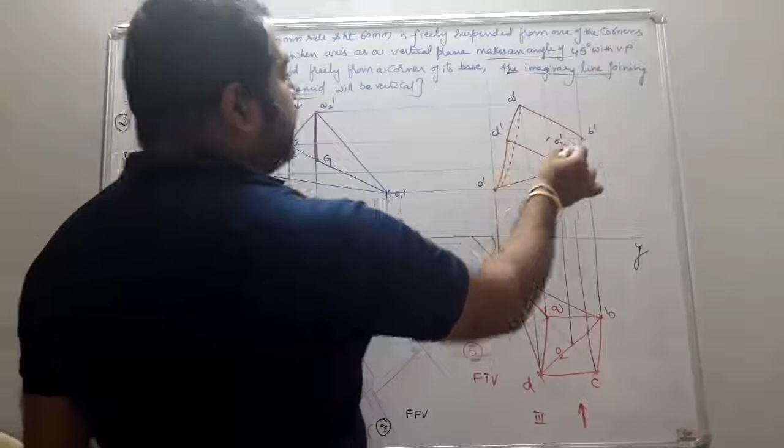When I see here, the top base is completely visible. So the base is a completely solid line, and I obtain my apex, and I am supposed to join all the corners to the apex. No two solid lines can cross. So here to here, no problem. If I join here to here, there was a solid line, so I had to make it dotted. So from here to here also dotted.

That is, BO and AO are the dotted lines. DO, CO are the solid lines. O dash O2 dash is going to be the axis line. This becomes your final front view. Students, is it clear?